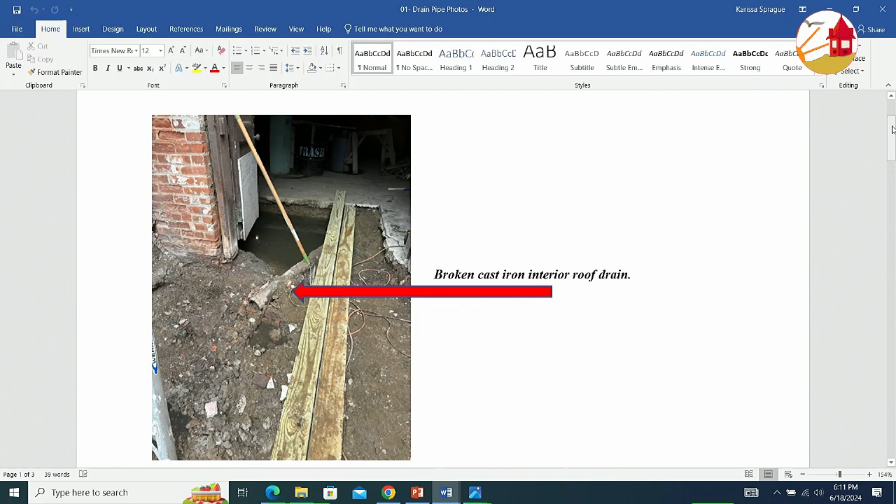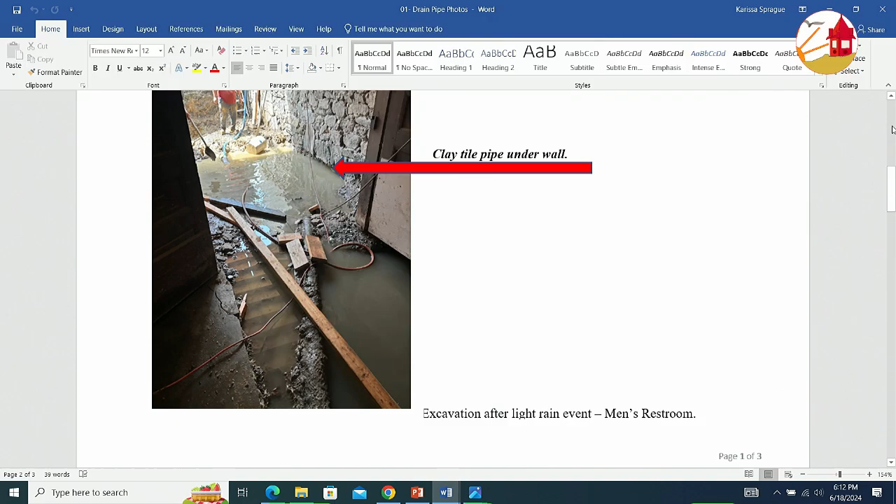So we revealed this, and at the time we were unsure as to its origin or what was feeding it, and then as we continued to do excavation, in this image, you see the arrow points to what we believed is the other end of the broken pipe. At that point, that pipe is clay. The pipe on the inside is cast iron.

The change order proposal is to continue the broken cast iron pipe. Disavowing any use of the clay tile pipe, we will run a cast iron line all the way out to the catch basin in the parking lot.

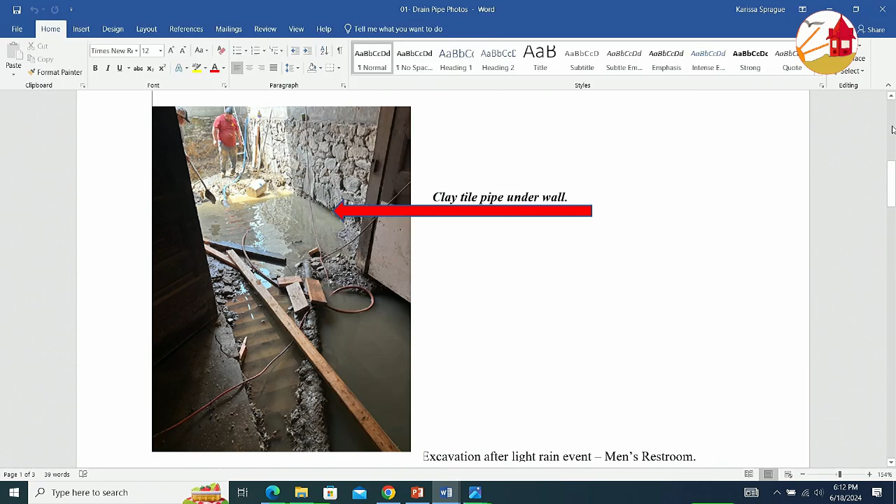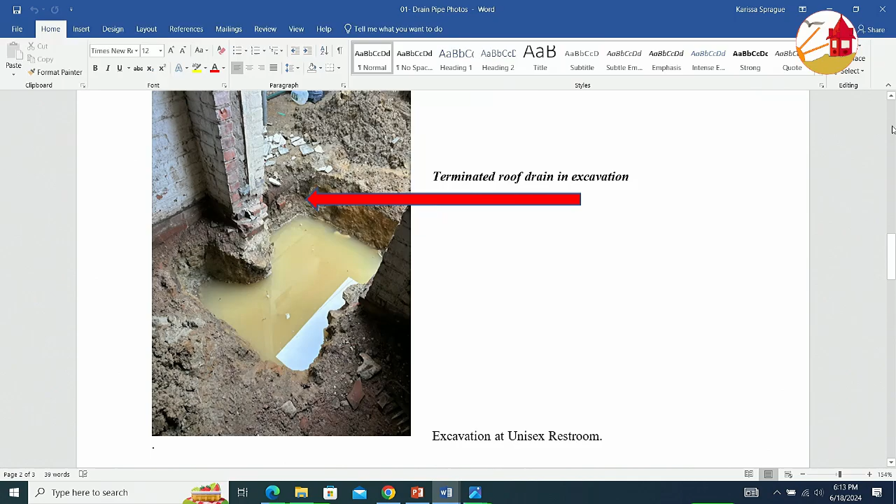During the course of the excavations for other parts of the ADA bathrooms, we came upon other storm drains, roof drains that had been blocked off, terminated, and we can only surmise that there were a host of reasons that the water probably was surcharging back into the building. By joining the pipe, water that is now filling the hole, and this is the foundation for the ADA bathroom, the water will no longer pour into and under the excavation.

What this image shows you is there's an 8-inch cast iron line from the original construction. We found it on old drawings, which was intended to take the roof drains and bring it to a cistern on the beach level. Again, we can only surmise that this has been terminated and filled with concrete to prevent the surcharge of water into the space.

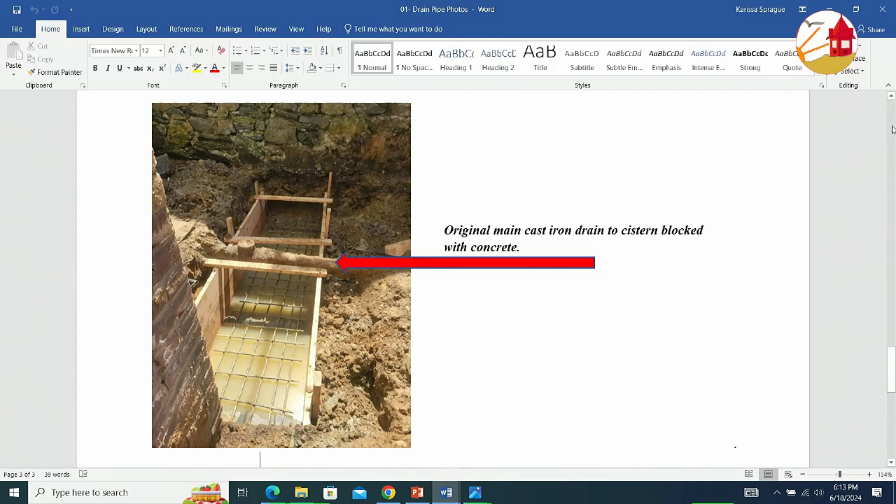That's basically the summary of the proposed drain line and change order.

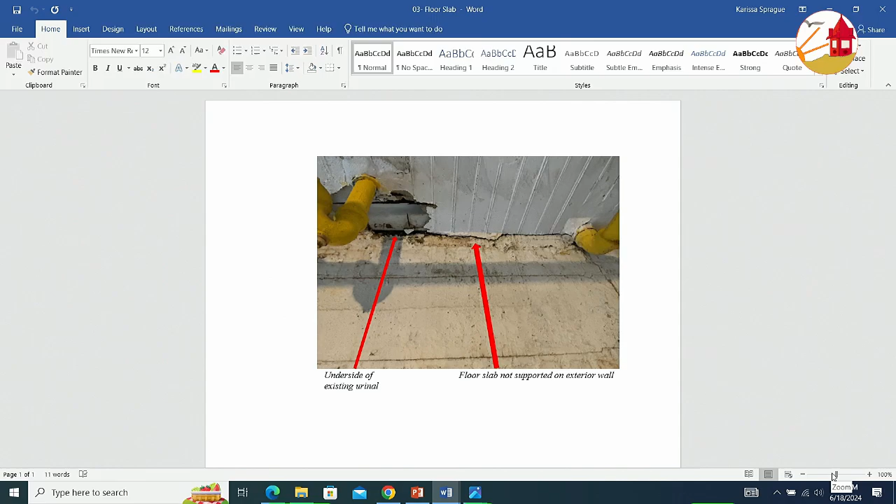Talk about the part 2, the ceiling. Yes. During the course of the demolition for the ADA bathrooms, a portion of the ceiling in the new bathroom, which is the floor of the existing bathroom, as you can see on the left, there was a portion of the concrete that just fell out, and it revealed to us the bottom of the urinal in the floor above.

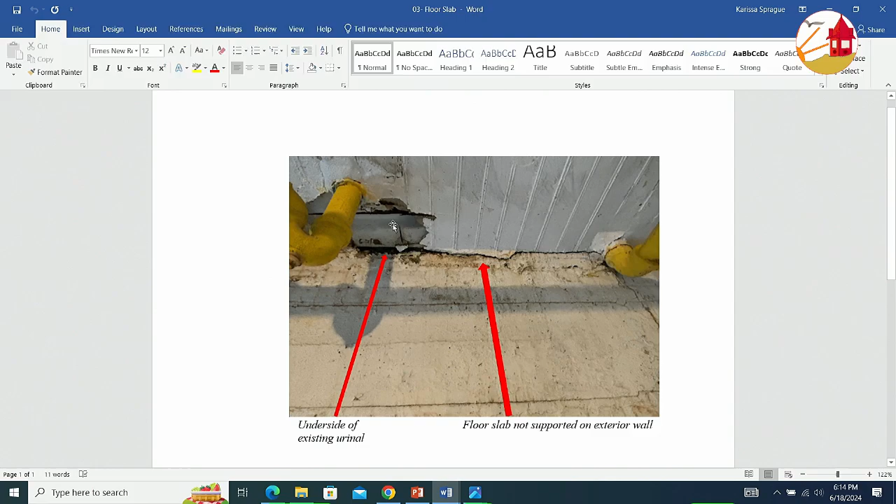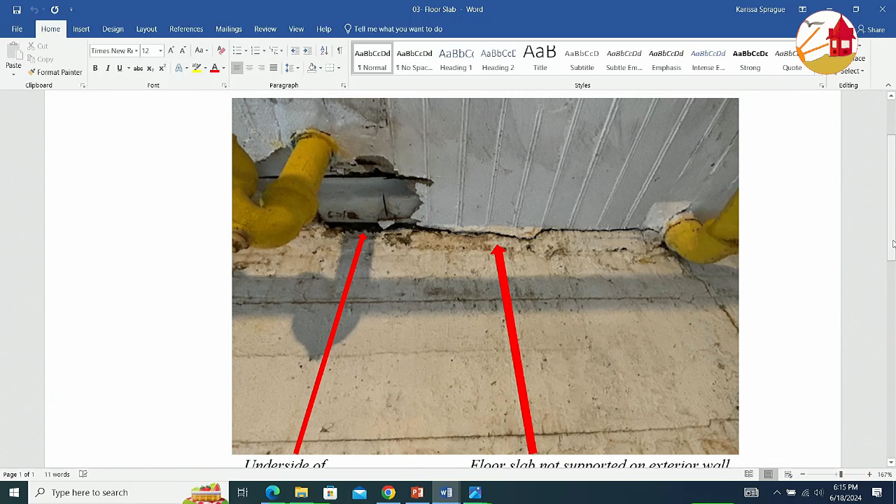It was a little hard to imagine that that was in fact the case, but when I went upstairs into the existing bathrooms, you can see that the floor, you see the striations on the floor? That is a patch. Somewhere along the line, a patch was performed about 2 feet wide all across the bathroom, and when they poured the patch, the urinal was in place, and more importantly, the concrete never went over the wall that it sits on. It meets it, but it doesn't sit on it.

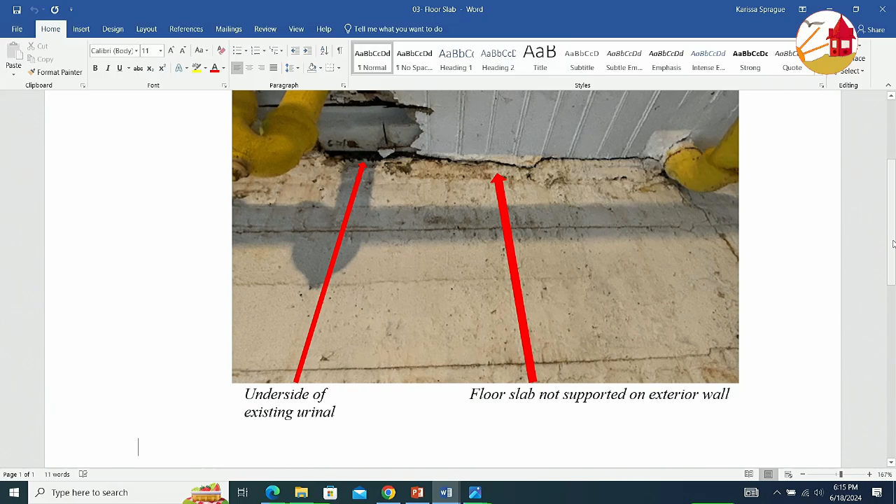So the steel proposal is to keep the concrete in place. We're not fixing it per se, but we're keeping it in place, and by picture framing the steel at the bottom of the underside of this patch, we will now support it off of the 4 walls that surround it and tie everything together.

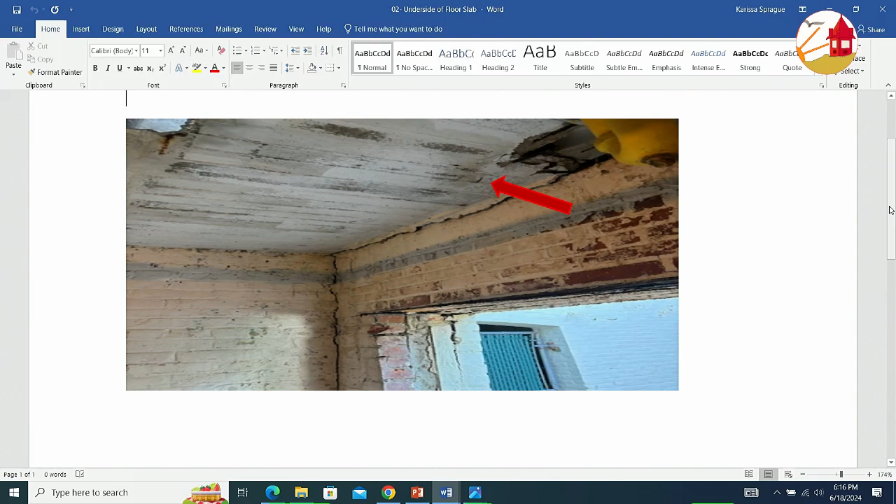This work would have needed to have been done whether you were doing the ADA bathroom below or not, because this is a hazardous condition. There's the other photograph. So the patch runs from the brick wall on the right all the way to here. That is a patch different than the rest of the floor that is there.

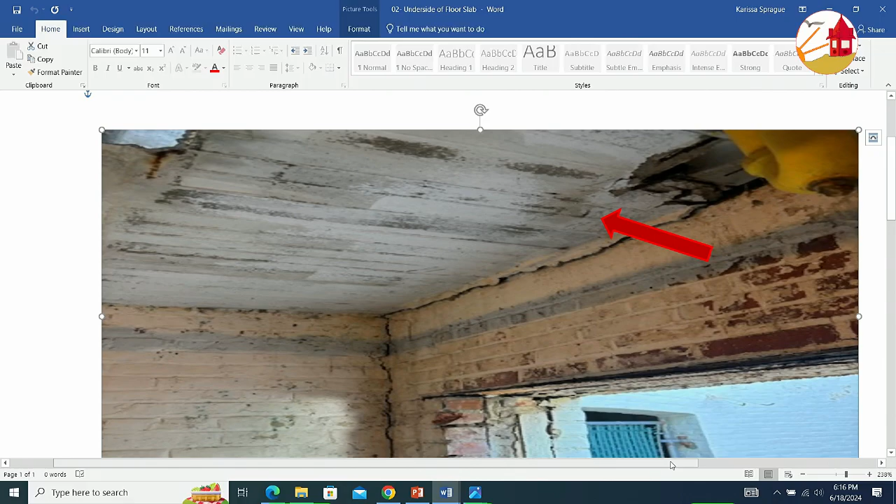You can see none of it ever bears on the outside walls. Somehow, some way, there's something holding it up there. But needless to say, holding it up is one part, holding it all together is the more important part, which we will accomplish by steel framing. It's light steel framing, not anything enormous, but it'll be consistent and well applied.

Okay, thank you for the explanation. Do we have any questions? Gary, just explain how you're going to continue to be able to do drainage with this backflow issue.

I mean, I don't think I get it. Clearly, it was cemented over because there was a backflow issue. So how does that get remediated with what you're proposing? Well, to the extent practicable, this will keep the water out of our new construction.

What we experienced was a rain event after we uncovered everything, and we had water coming in from both ends of the pipe into the excavation. That will no longer exist. It won't impact our new development.

Ultimately, as we continue to go through this building, we just keep finding these kinds of things. I just want to make sure I understand, because this is a fairly straightforward change order, but I'm wondering what it implies. So where does roof drainage now happen if this pipe is no longer a roof drainage pipe?

Where it probably was happening until we cut up the slab, it would be underneath the slab. Now, when we construct our new ADA bathroom, we're going to raise the elevation and get about another foot of gravel underneath it so that it doesn't impact the new construction. But there may still be water migrating underneath there.

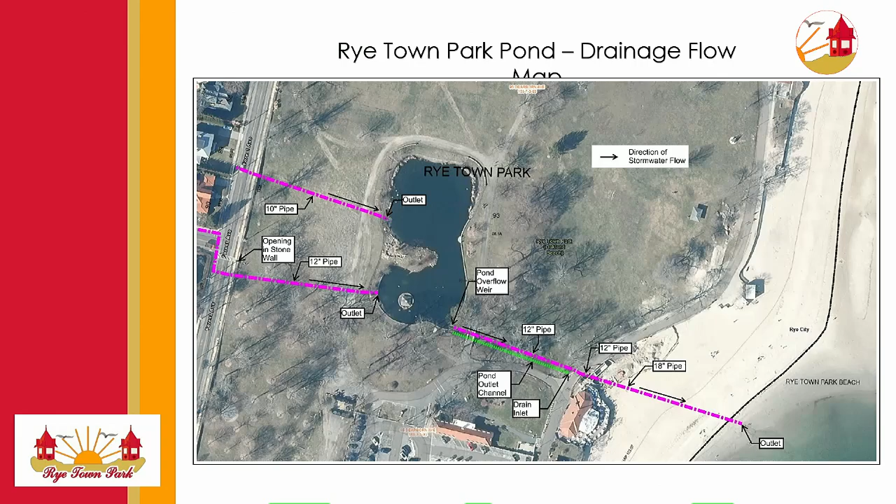This had to be repaired, which it eventually was, but this is what happened—this is the condition when those two pipes coming from Forest Avenue can't keep up with the flow: it floods the intersection and comes through the wall.

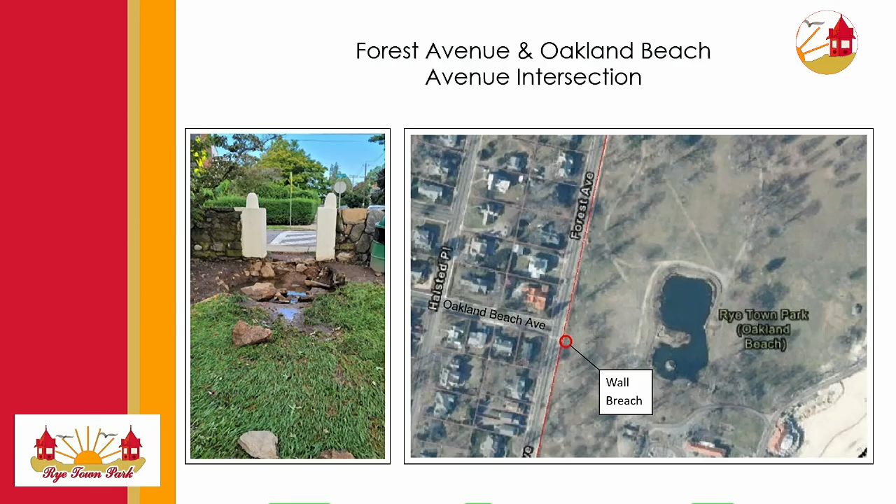This first section of flooding leads directly into the second, the auxiliary parking area, where during busy times patrons park their cars. As the water comes through the opening in the wall, it starts to wash out that field—you get a lot of erosion, some ponding, but it basically tears the top off that section of the park.

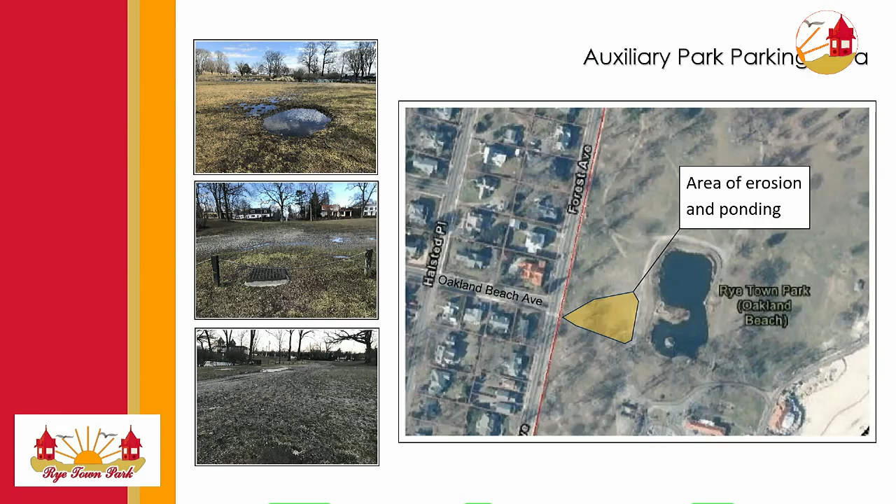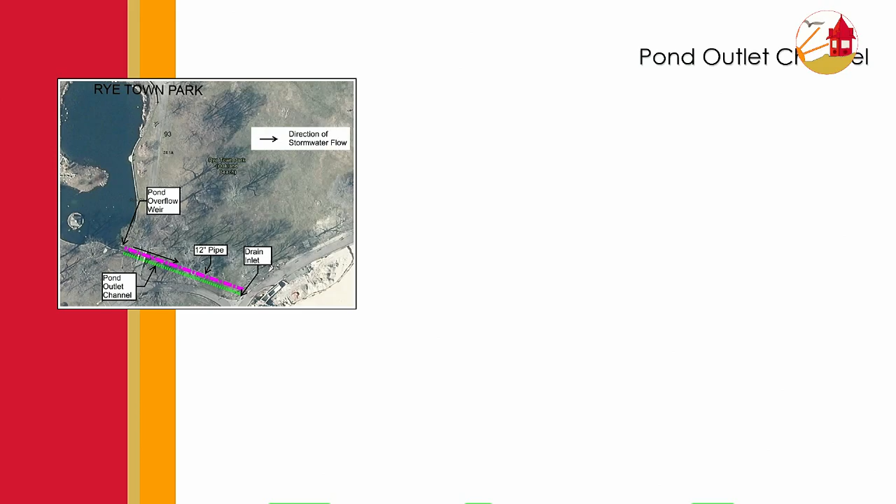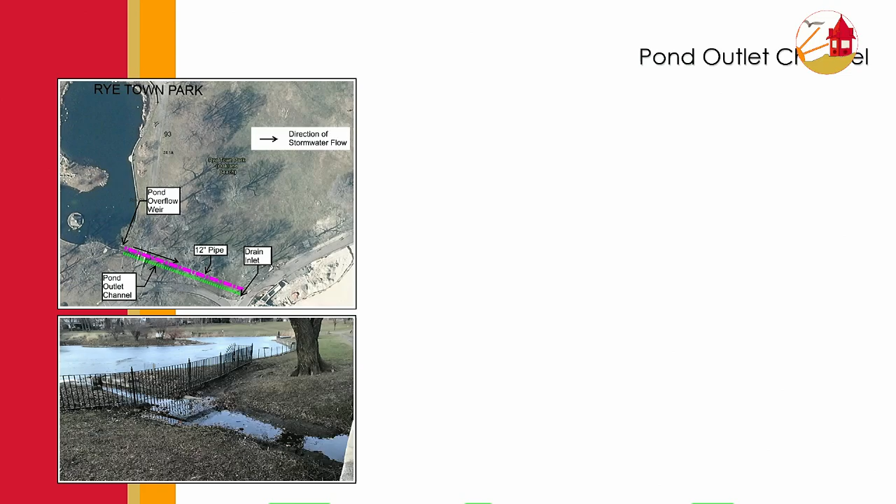We think at one point this was designed with a small box to the right of the fence, which we believe allowed water into that box, acting as a control structure that conveyed water into the pipe I mentioned before that flows east. Back in 2019, we TV'd that pipe and found it's clogged with roots.

So it's not really conveying much stormwater. What it is conveying is some groundwater. Some of the roots are infiltrating the pipe, separating the joints, and you get this groundwater inflow. You can see it in that photo coming from the right, consuming the capacity of the pipe.

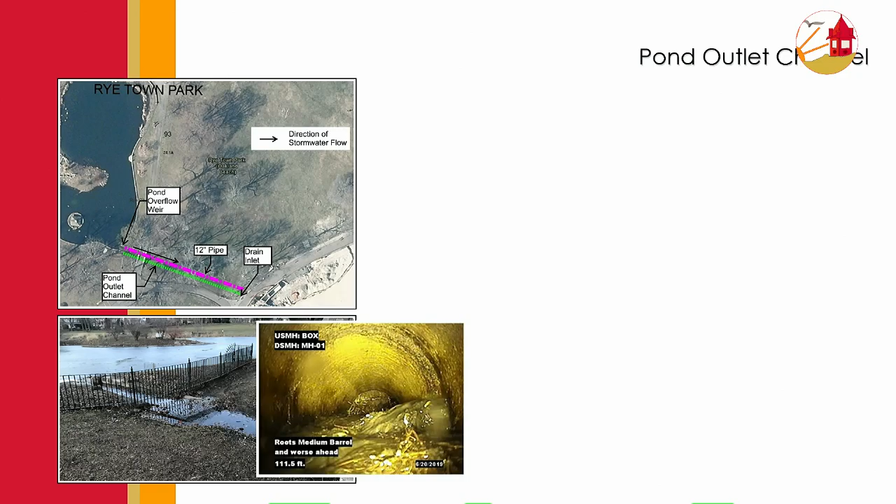We think this pipe is really doing nothing for the pond itself. All of the outlet from the pond is going overland through the channel, which this was, I believe, after Ida, really becomes inundated with stormwater. So it flows through this channel.

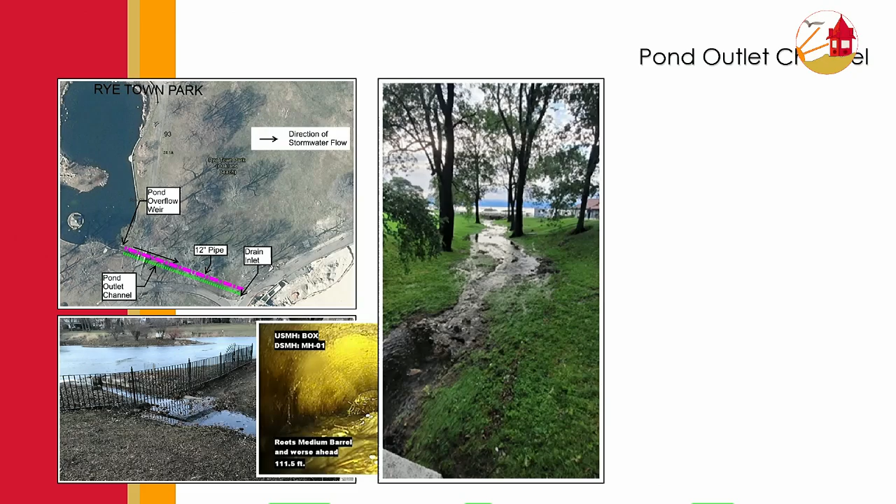As it starts to pick up velocity, it completely erodes. It's your river, the Rye Town Park River. It begins to erode the surface of the park, taking away grass and the underlying soil.

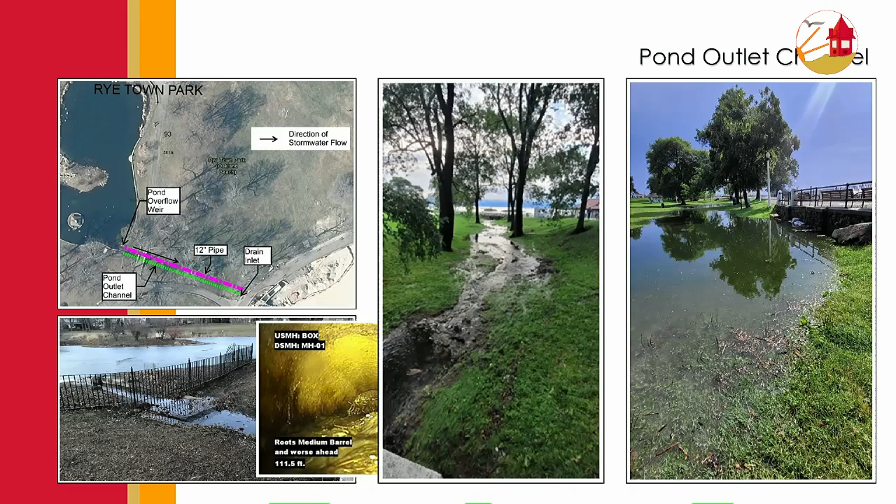As it gets down to the east, it starts to pond, when the infrastructure just downstream of it can't keep up with the flow, because it is a tremendous amount of water. There are a few different reasons why this happens, but this is an area that's available for ponding, and it does flood from time to time.

When there's a drainage structure underneath that ponding area, and when it's opened and when it can convey stormwater, it takes the flow and conveys it to the east towards the sound.

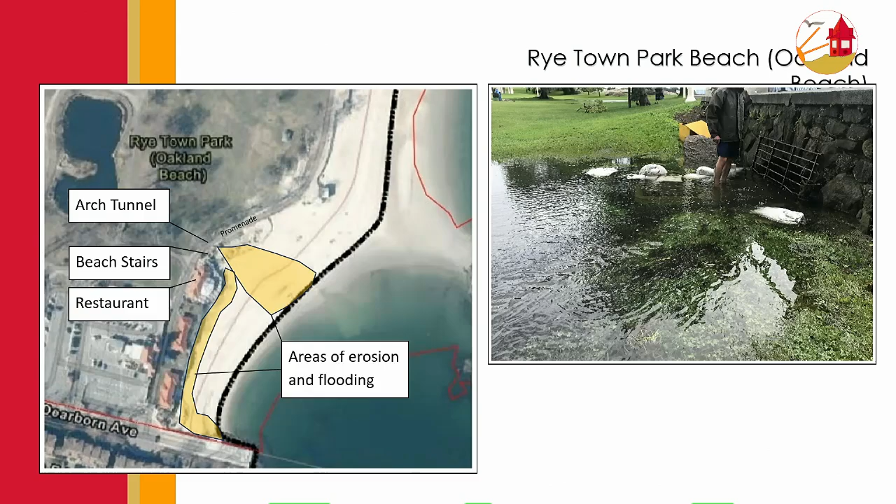So the next flooding area is the beach itself. There are two main areas, and I'll split them up and talk about them separately. The first being this triangular area that starts at the arch tunnel underneath the promenade. The upstream side of that, you can see here in the photo, is on the right-hand side.

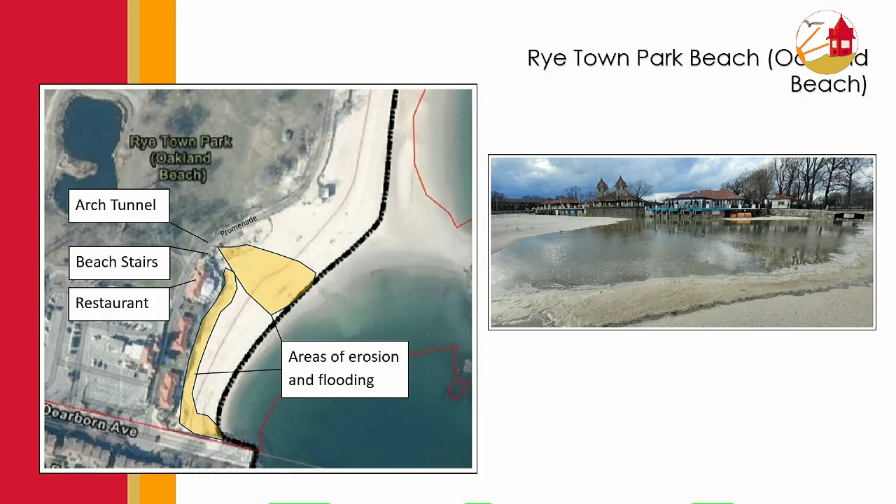The downstream side of it is on the right-hand side of this photo. You can see as the water comes through, it just washes out the beach as it heads out to the east. And if it can't get out, it begins to flood. It sits there, but when it picks up some steam, it really begins to erode the beach. After Ida, it actually left about a 2 to 3 foot crevice in the beach itself.

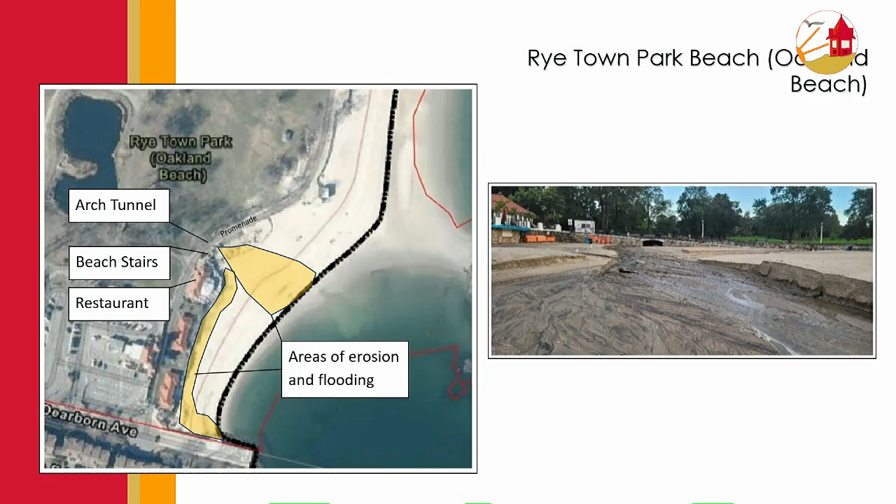The other area is an area that wraps around along the seawall to the south towards Dearborn Avenue. This area is naturally low because it needs to meet the grade of the restaurant and some of the openings in the seawall, and it's lower than the rest of the beach to the east, so it's kind of where some stormwater gets trapped.

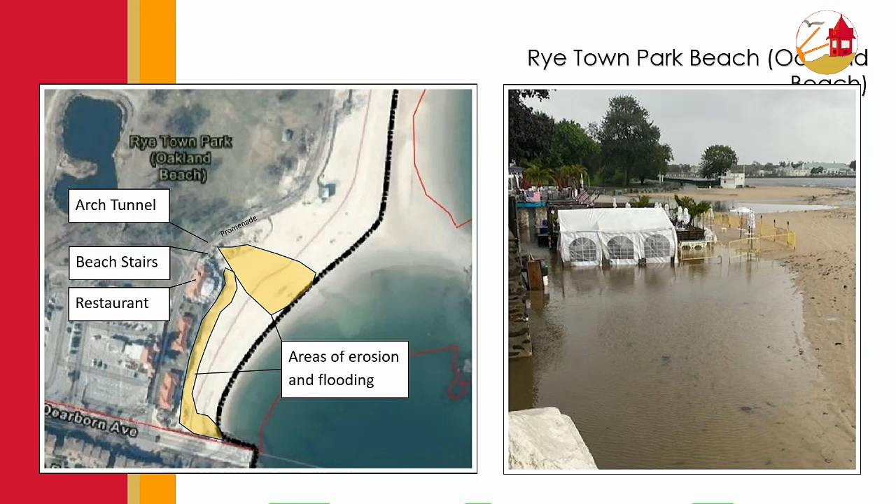When the first area I was just talking about can't get the water out fast enough, it starts to come around this side and head to the south. As it continues south along the seawall, here's another photo of it heading south towards Dearborn. It makes a turn and heads out finally to the sound, taking a lot of sand with it.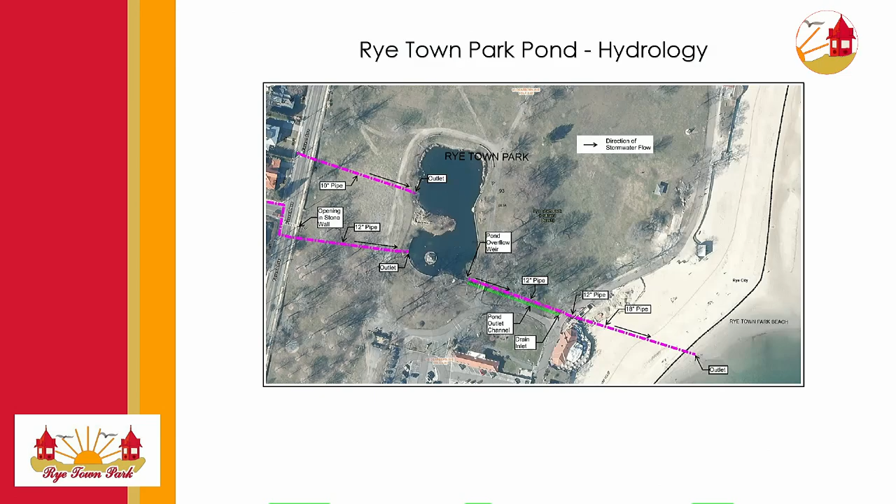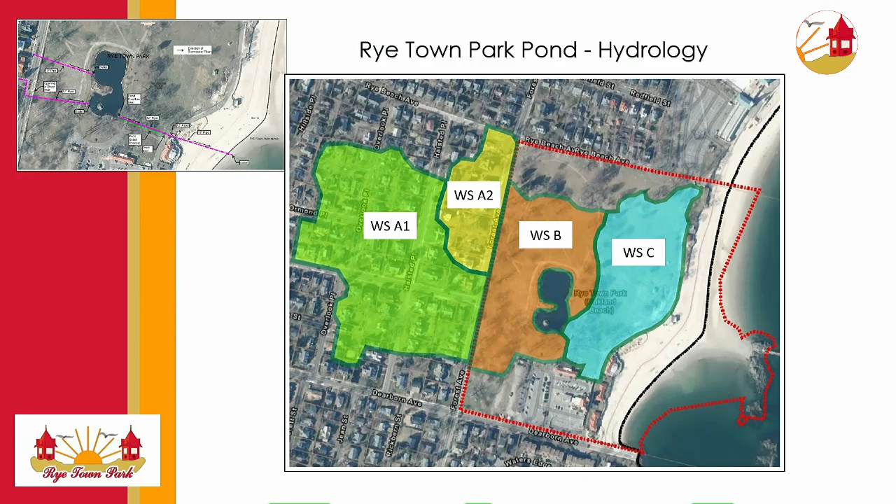Watershed B is just overland runoff that goes into the pond. And watershed C is overland runoff that goes into the channel that's just downstream of the pond.

This is the hydraulic model that we put together. The green hexagons are those different watershed areas, and the blue triangles are what we're calling ponding areas. These coincide with the areas I just mentioned before where we're seeing all of the flooding. So we felt it was necessary to model these areas as ponding areas because they're holding water. P1 is the intersection of Oakland Beach and Forest Ave, P2 is the pond itself, and P3 is the lower park ponding area.

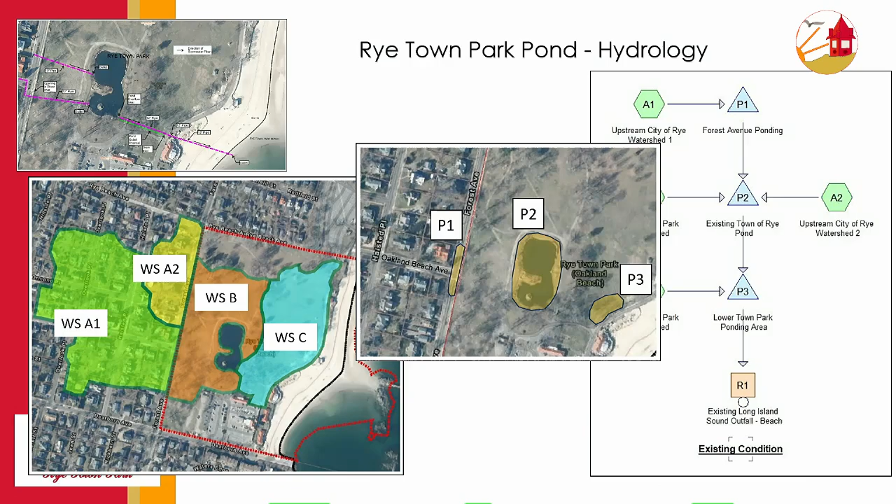We didn't model the beach because it's not necessarily holding water in a way that we want it to. We want to pass water through there, so it wasn't necessary to model that as one of the areas. And what we found was predictable: water was coming through these areas at different elevations during different storms, but none of these areas were sufficient or adequate to convey the amount of stormwater coming in.

So what this shows you is just graphs of when those events occur, when the overflow through the wall breach on Forest Avenue comes through, as the water comes over the spillway, and the water goes through the arch tunnel towards the beach. These are the three separate ponding areas we were talking about.

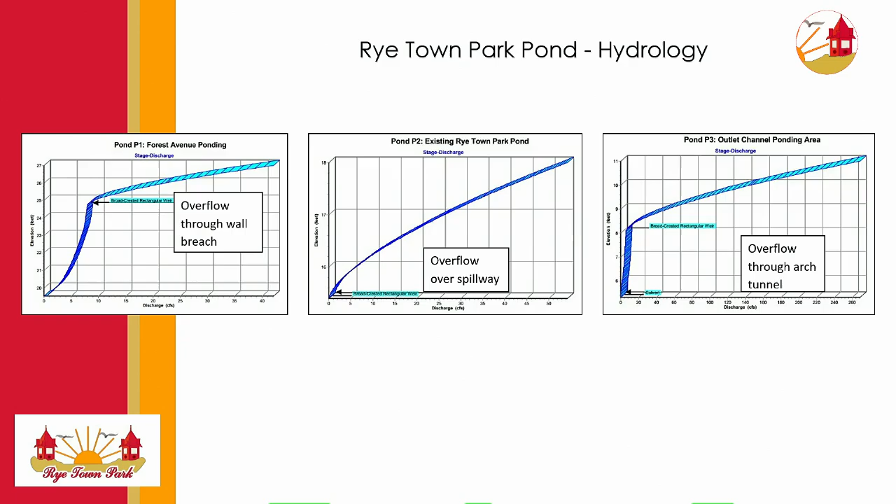So we looked at a few different schemes, but the first scheme we wanted to look at was kind of the brute force method. What if we just didn't change anything else about the way the water flows through the park, except increase everything, just make it bigger to convey the water.

So in this scheme, what we're doing is making slight modifications to the spillway of the pond. We're also making slight modifications to the drain at the bottom of the channel area. And the idea there is to allow those areas to hold back a little bit more stormwater and give the infrastructure downstream time to catch up.

So what ends up happening is you create these ponding areas. There is some ponding that happens in these areas right now to some extent, but we would be formalizing it and controlling it so it doesn't create erosion. That's the first part of this plan.

The second part is to make all the pipes bigger. So right now, there's this 12-inch pipe running from the pond towards the beach, which isn't working. So we'd have to change it to, on the order of magnitude, about a 24-inch pipe, maybe bigger, to convey the amount of water that's coming through.

And keep in mind, we're still taking all of the stormwater coming from the city of Rye from those two pipes into the pond. And this doesn't address any of the flooding happening on Forest Avenue. So we'd have to put in a pipe that goes from the pond down to the promenade. From that point, we start to take on more stormwater - that's watershed C that comes into that area.

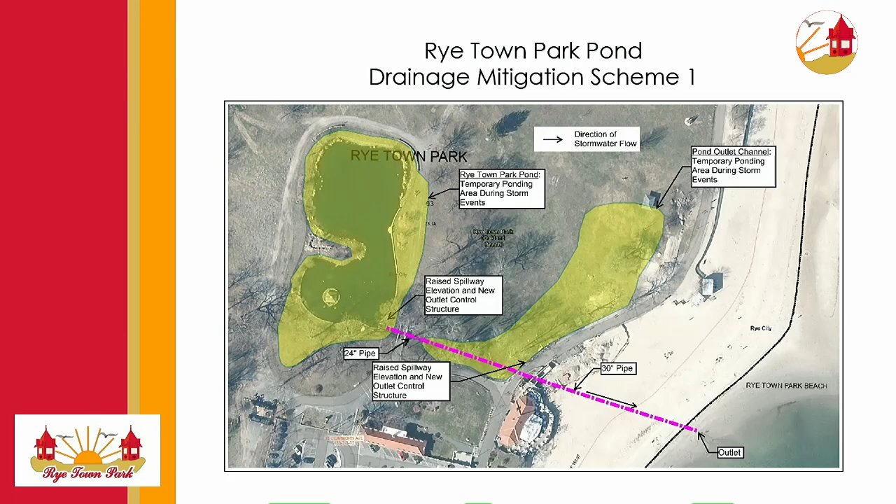So we don't like this idea. What we're finding is that the problem is really the quantity of stormwater - it's just too much for this pond to handle. This pond was originally, I don't know if it was ever designed, but it just began as overland runoff from the park. It was never intended to take stormwater from the city. For a while it had been working, but it's met its life, I fear.

So what we want to do is divert as much stormwater away from the pond as we can. That's where mitigation scheme 2 comes in, where we would circumvent the pond. This means taking the stormwater from the city of Rye, connecting those two pipes, disconnecting them from the pond and connecting them to each other, bringing them down Forest Avenue, making a turn, going down Dearborn Avenue, and daylighting out through the end of the seawall into the Sound.

Some challenges with this plan: it requires a deep excavation in Forest Avenue. If you're familiar with the topography, there's a high point about halfway down the block between Oakland Beach Avenue and Dearborn Avenue. So as the pipe is going down and the grade is going up, we're bucking grade, and that will require pretty deep excavation.

We'd have to find a lane, an alignment somewhere in that road where we're respecting the required distances from water mains and gas mains, and anything else that might be buried there. We'd be talking about a large pipe, an arch culvert about 4 feet wide and 2.5 feet tall, to convey the stormwater safely and out. This would convey the 100-year storm, and I should mention the previous plan, Scheme 1, was also designed for the 100-year storm.

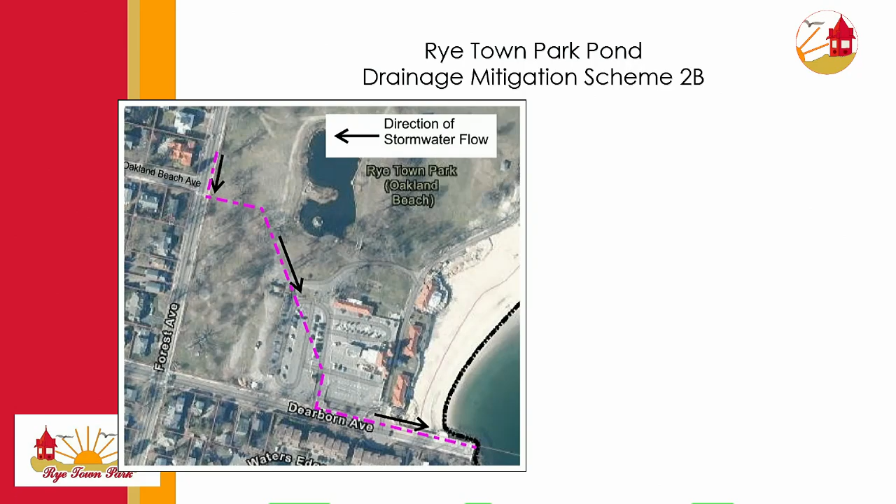The other two ponding areas would still be ponding areas, the ones I mentioned before, where you'd get a little more ponding around the pond itself, some down along the promenade, in areas that can take some water, and over time they would drain after the storm is over. They would not remain wet.

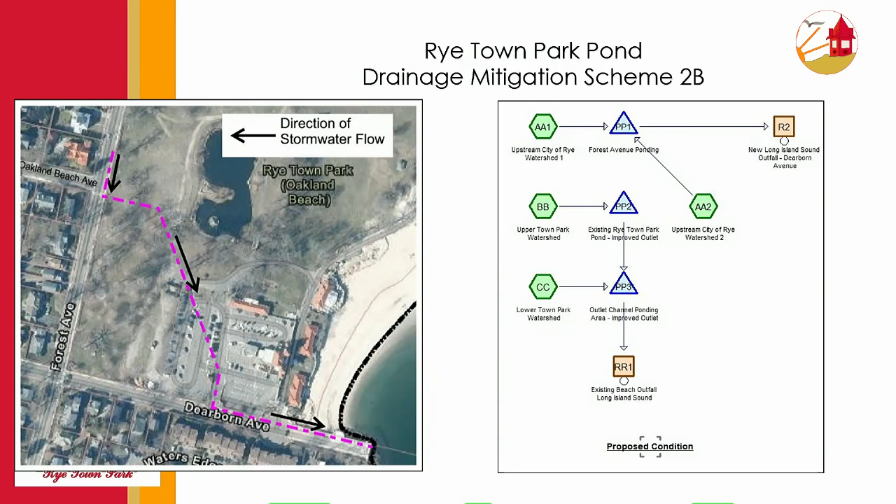This is generally the hydrology of what this proposed system is. AA1 and AA2 are the City of Rye watershed areas, which go directly to Forest Avenue and then out to the Sound. The Upper Town Park watershed goes to the pond, and the Lower Town Park watershed goes to the outlet channel. We would make some improvements to both of those ponding areas to increase their capacity during storms, but otherwise we wouldn't change the existing spillway elevation of the pond—the level it's at now is how it would stay in dry weather. Only during storms would we want it to pond up a bit more, to give downstream infrastructure a chance to catch up.

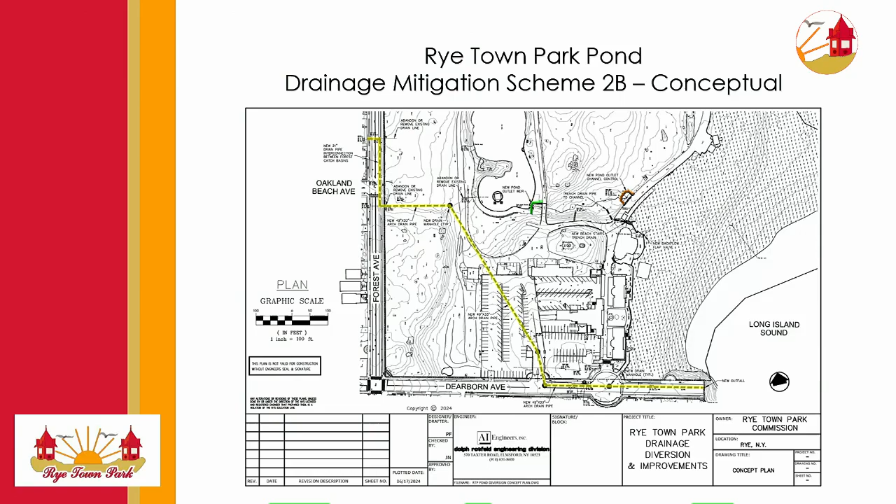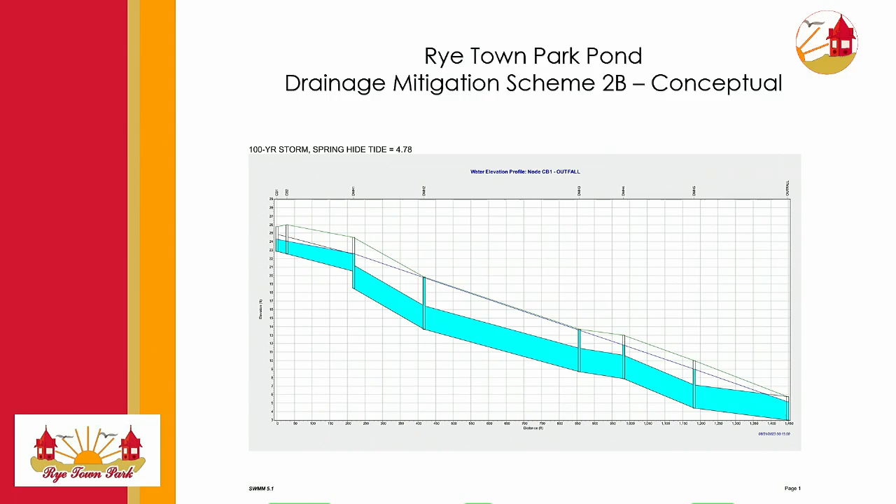The scary part. So this basically is taking the water from Forest Avenue, right? We're not dealing with this plan, we're not dealing with the water that emanates only from the park. We are to an extent. So the first part of your question, yes, that's true. This is taking all Forest Avenue and those upland areas that are coming into Forest Avenue into that system, and rerouting it around the street and the park. In other words, this is the City of Rye water discharge as opposed to the park water discharge. That's correct. All the water you see in this pipe, in this elevation, this profile, is all City of Rye stormwater from their drainage system.

The next part of your question was about addressing the infrastructure of the park itself. What we are proposing is some improvements to the spillway, some improvements to the lower channel area coming out from the spillway to allow those areas to pond up a little bit, where we know that those are safe areas in the park where water can get impounded, and still, at least during the storm, they can be safe in those areas. Over time, after the storm ends, those would drain out and return to their dry day state.

What would you do with the archway under the promenade? It would remain as is. The only thing that we would have to change there is that at the end of the channel where that drainage structure is, there's a 12-inch pipe that leaves that structure heading downstream for about 20 feet before it changes into an 18-inch. The 12-inch is restricting the flow, so we would have to increase that to an 18-inch to match the downstream. That 20 feet is all underneath the promenade. There may be an opportunity to do that without upending the promenade, maybe there's a way to do that by hand underneath in the tunnel. We haven't looked at that yet, but that is part of the plan. That would have to also be done to increase the capacity of the system heading out to the sound.

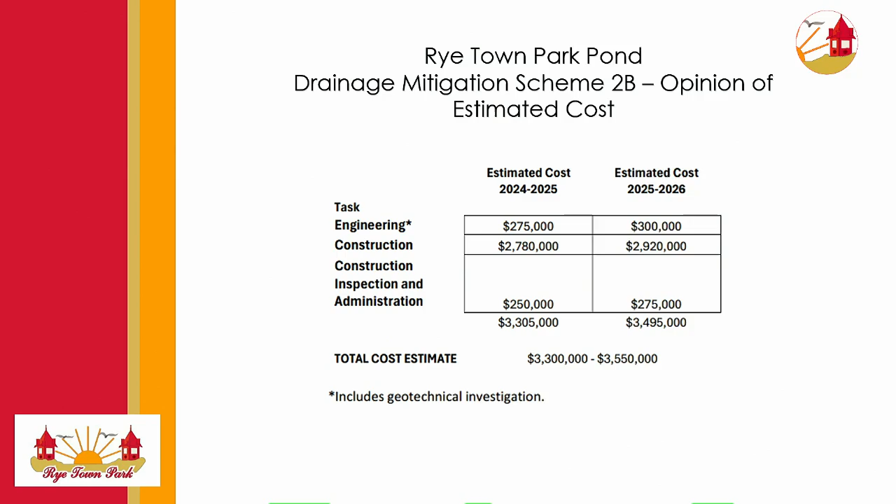And then we've also included construction inspection administration, which we figure construction would take about 6 months, conservatively. And those are our numbers. The range is 3.3 to 3.5. My guess is closer to 4.

So, all right, James mentioned FEMA. I was going to give a little update on our capital program that's under consideration. FEMA is one source of revenue. The other source is the county stormwater management program, which we have already started discussions with. Hopefully between the two of them, we can get 100% of the funding, whether it's 3.8 million or 4.2 million.

We're not going to know that number for a while. But James, would you consider that this is now the final plan, or do we need more, let's say, touching and petting it a little bit to bring it to the fore?

I would say the initial planning part of the project is done. If the commission elects to go with this scheme 2B, we would go ahead, well, we'd have to talk about how the different steps work, but we would start looking into the details of the plan. What exactly do we need to do to the spillway? What does that require structurally? What does it require to make the improvements to the channel as well?